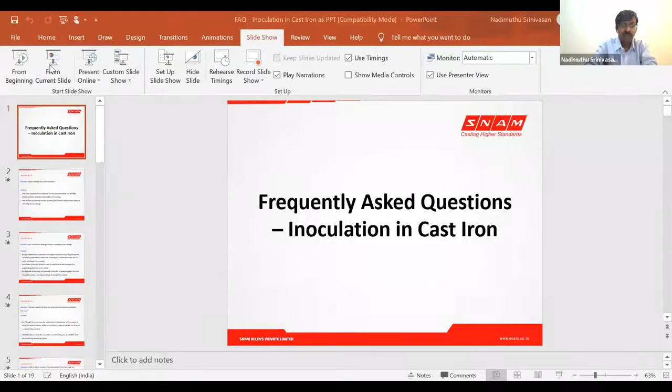So I hope my audio is audible and you're able to see the screen completely. It's perfect. Okay, thank you. So let me proceed then.

So I will go over the questions. I have selected around 12 questions. Of course, not exhaustive, because you, the foundryman, face plenty of issues. Mr. Manish Patrikar has also briefed you that we have to look inward first, look at the process, and the solutions that come from these are like the salt that Mr. Kumar said. It's all the ingredients together that form a good casting. But we have these questions, so they keep popping up.

So what is the purpose of inoculation? The main purpose of inoculation is to reduce undercooling and thereby provide uniform nucleation throughout the casting. The uniform nucleation ensures uniform graphitization. Now, just to explain the terminology, if you go into YouTube and look at undercooling of water, water is supposed to freeze at 0 degrees and form ice. If you keep it at a still temperature, even at minus 4 degrees, it does not form ice. You just tap it and you will see that it suddenly freezes.

So the same thing, undercooling is that it doesn't freeze at the given liquidus point, it goes below that. And then if it suddenly solidifies, you have carbide formation. So you have to reduce that undercooling and see that, at the eutectic temperature, the metal freezes. This is the main purpose of inoculation. By doing that, there is a uniform graphitization, and that helps achieve good casting.

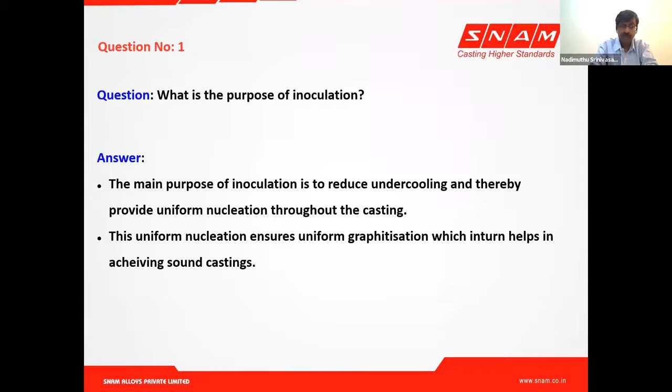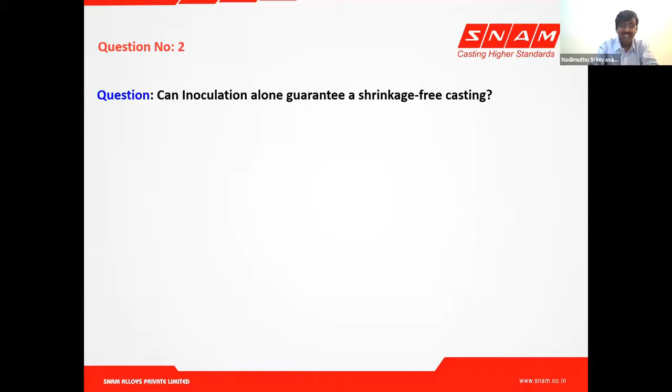Can inoculation alone guarantee a shrinkage-free casting? Something Mr. Manish also addressed. During solidification, volumetric shrinkage is bound to occur because of the austenite contraction. That is why by altering chemistry, the graphitization potential, and changing the solidification rate, we can avoid shrinkage. What does this mean? If you had only carbon, why don't we just melt pig iron and form the casting? When there is austenitic contraction and volumetric shrinkage is happening, you need the right presence of carbon for the free graphite to expand and fill within this volumetric zone and provide you a sound casting.

So how does that happen? By inoculation, which influences the rate of solidification by reducing the undercooling. And how does it increase the graphitization potential? By improving the nucleation sites. By improving the nucleation sites, there are a lot of areas where graphite is going to expand, and the volumetric shrinkage that is distributed throughout is compensated by the graphite expansion and provides a shrinkage-free casting.

So you need the rate of solidification, which can be done by your methoding, your chemistry, which influences the TL and the TE low, the liquidus and the solidus temperature also, and inoculation provides a nucleation site where the graphite sits and expands. So all these three in combination can provide you a shrinkage-free casting. Inoculation alone will not provide you the solution.

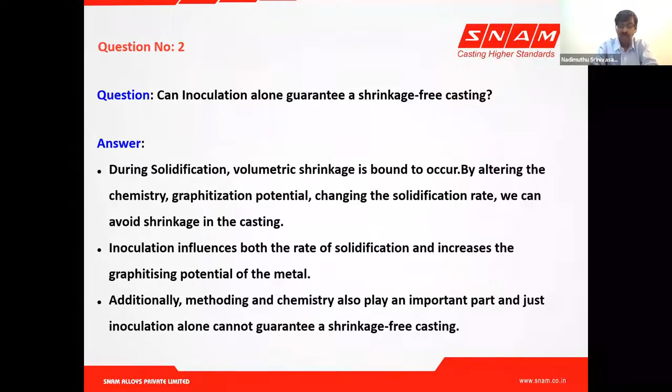There is a myth that gray cast iron does not require inoculation. Is it true? Because some people have been telling this. No, because the manganese and sulfur from your base metal form the substrate for the nuclei. But for this manganese sulfide substrate to sit, it has to sit on a barium oxysulfide or a calcium oxysulfide or aluminum oxide or strontium. Above that MnS, and above the MnS is where your graphite locates and expands. So you cannot just feel that without any inoculation, I can produce gray cast iron. That is not true.

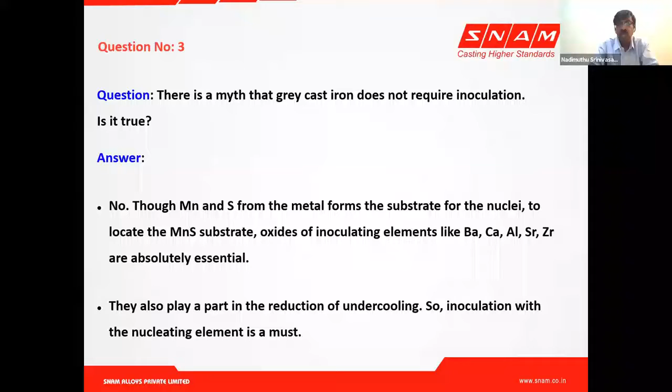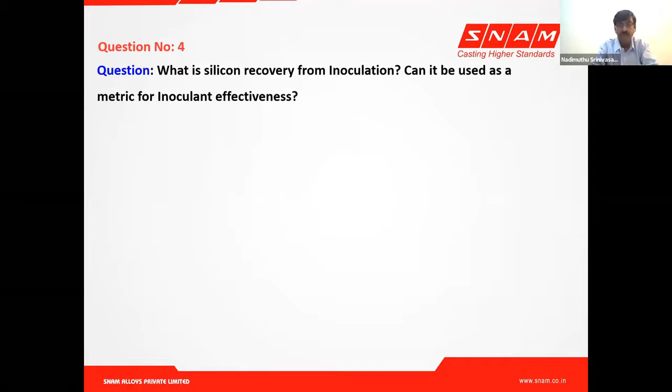What is silicon recovery from inoculation? Can it be used as a metric for inoculant effectiveness? I'm giving you some scenarios where the silicon percentage in your inoculant is 65%, 70%, and 75%, assuming a uniform addition rate of 0.2%, and you get a silicon increase of 0.12, 0.13, and 0.14. So if you were to look at it, in the first case, 0.2 into 65 should be 0.13. You have got 0.12, which means the recovery of silicon from your inoculant is 92%. So each case I have presented.

Now, in alloying, the method to increase silicon is by addition of ferrosilicon. You should not look at increasing your silicon from the inoculant and use that as an effectiveness measure for the inoculant. The purpose of the inoculant is to provide nucleation sites. The purpose of ferrosilicon in the inoculant is to be the carrier for these elements like barium, calcium, strontium, which hardly take up more than 5%. So how would you add that 5%? You need a carrier. The carrier is ferrosilicon.

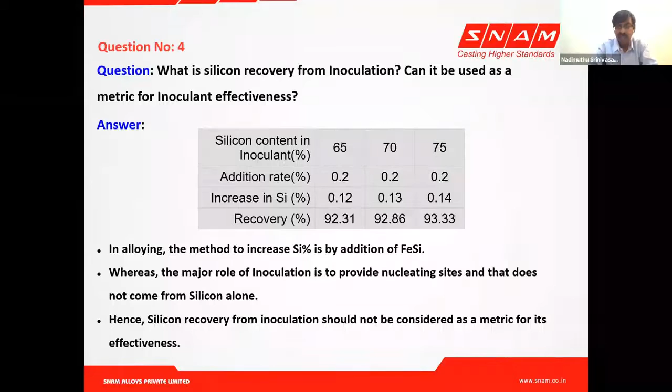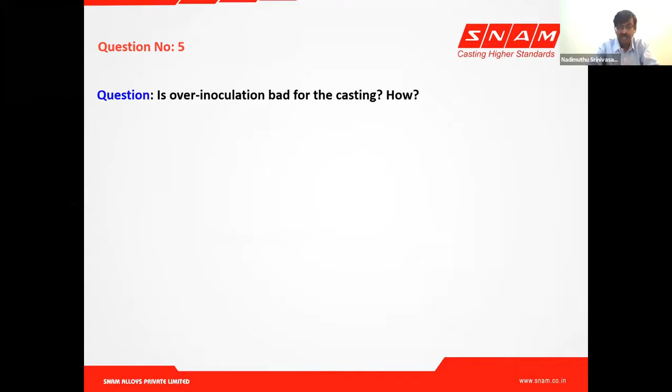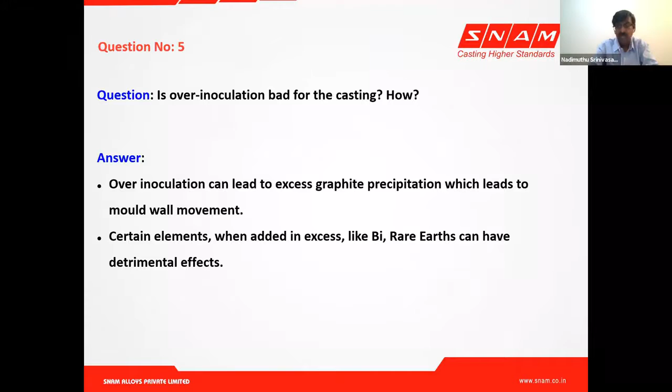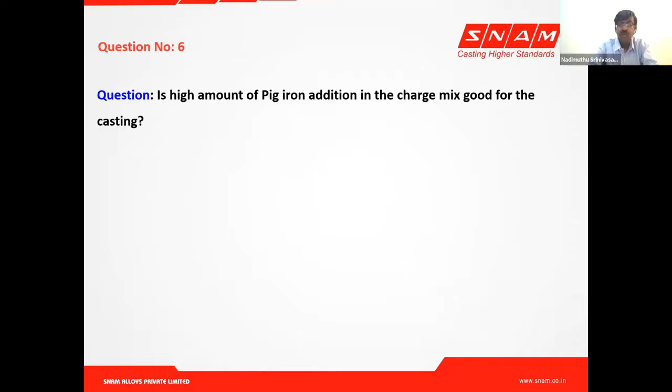Is over inoculation bad for the casting, and how? Over inoculation can lead to excess graphite precipitation, which can lead to mold wall movement. Also, special inoculants like bismuth and rare earth, when used in excess, provide detrimental effects of carbide formation or machinability issues.

Is high amount of pig iron addition in the charge mix good for the casting? We have been doing some experiments on the percentage of pig iron to use. Pig iron, when added in a specified ratio, improves graphitization potential because of the presence of elements like sulfur. But a higher addition of pig iron may pose a problem of higher carbon, and you must have finer control of your carbon equivalent.

Otherwise, this high carbon equivalent can give you lower mechanical properties. Also, other elements like titanium and phosphorus are present in the pig iron, which can affect the graphite shape and also result in carbides.

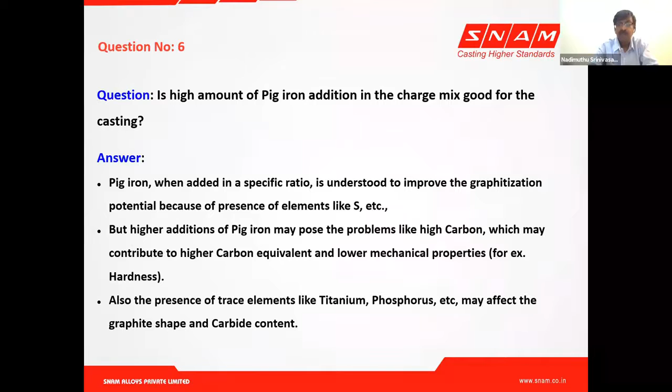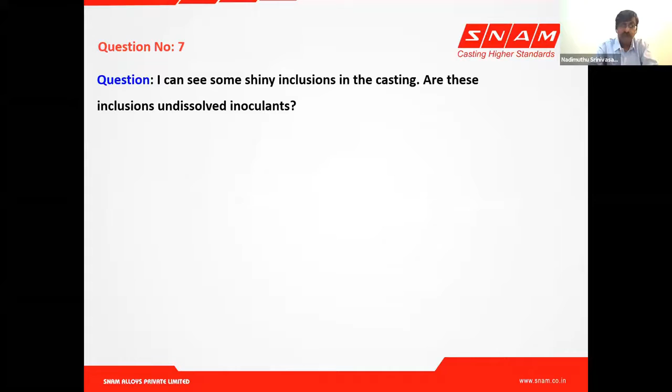Now, I see some shiny inclusions in casting. Are these undissolved inoculants? These are some of the questions that rise up for the foundry man. Inoculants dissolve in the temperature range of 1150 to 1250. In the pouring process, the impact of low temperature and inoculant practice can result in incomplete dissolution, leading to localized concentration of inoculant. If that happens, you may see some shiny inclusion, but they are not necessarily undissolved inoculant.

The way the alloying is done, a ferrosilicon-based inoculant should dissolve below the liquidus temperature of the chemical composition of the metal you are pouring. So there is very small possibility of the inclusion being inoculant unless a non-suitable size is used. You use a very big size in a small treatment ladle, or you add it very late so that the temperature of the molten metal is at TL, and by the time you add the inoculant, it starts solidifying. Only in such a case can it happen.

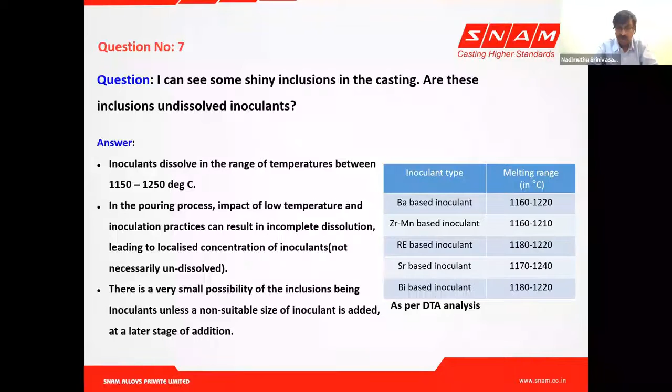The composition of the ferrosilicon based inoculant is designed in such a way that it melts even before your TL, the liquidus. So here are some of the temperatures - I'll go back to this, you would be interested. The barium based inoculant, the zirconium manganese inoculant, rare earth based, strontium based, bismuth based - we have taken these melting ranges based on the DTA analysis.

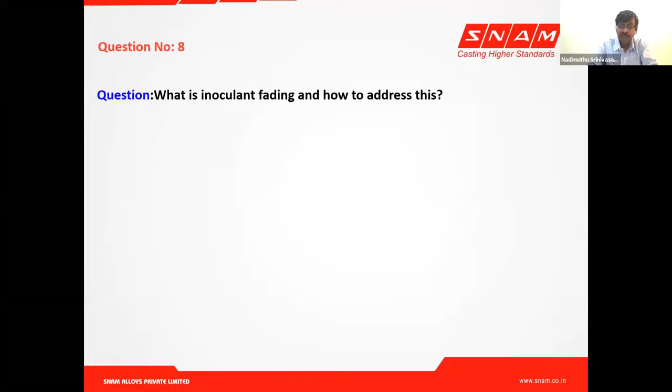Now, what is inoculant fading and how do we address this? I think inoculant fading was also described by the previous panelist, even with a graph. Effect of inoculation is maximum immediately after the addition. Unfortunately, the fading of inoculant is also maximum immediately after addition - 50% of the potency of the inoculation is happening very fast.

So how you add the inoculant, what size of inoculant you add, the temperature at which you add - these are very, very important. All inoculants, all your magnesium alloys and ductile iron, they all fade. It is a characteristic, so it is in the process parameters that you will have to counter the effects of fading. If you look at a barium-based inoculant versus a ferrosilicon with calcium and aluminum - barium acts when the temperature is above 1420, when you have a pouring temperature, barium is effective. Below that, calcium is effective in forming the calcium oxysulfate. So to some extent, the composition of the inoculant helps, but the inoculation fading has to be jointly addressed with the process parameters.

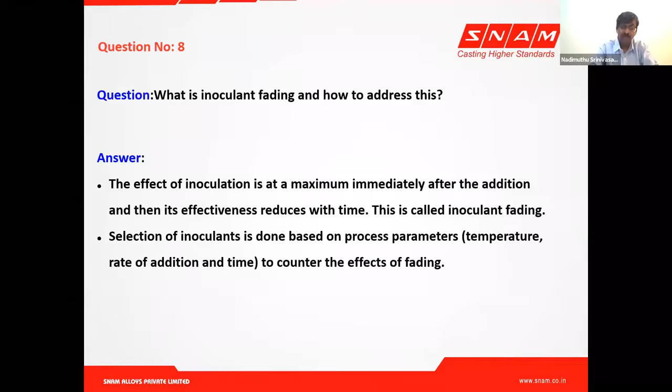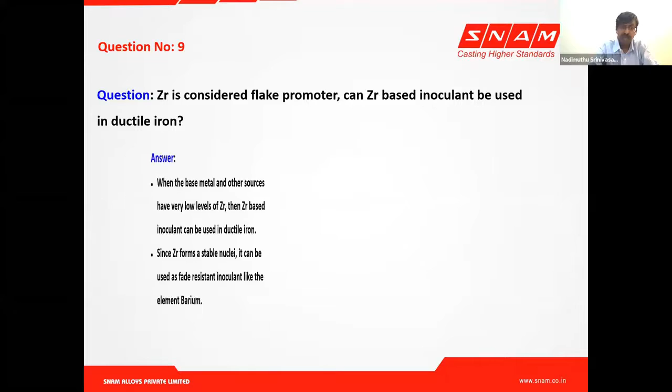Now, can zirconium be used in ductile iron? Because we have seen that being used in gray cast iron - can it be done? When the base metal and other sources have low levels of zirconium, yes, zirconium based inoculant can be used in ductile iron. We have seen ductile iron foundries using zirconium calcium based inoculant in their process. Since zirconium forms a stable nuclei, it can be used as a fade resistant inoculant. Barium, zirconium, strontium - they all form stable nuclei at a higher temperature.

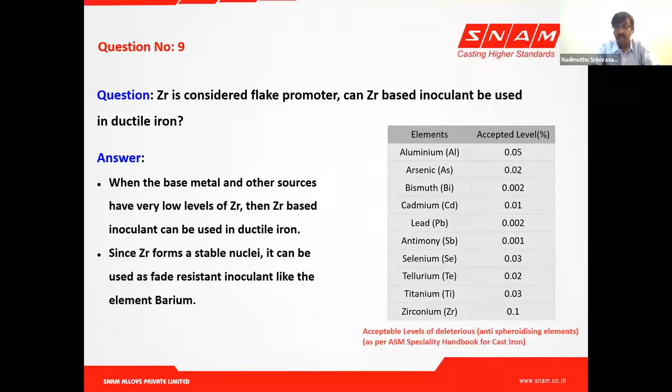So just to clarify, what is the accepted limit, since we mentioned the base metal and other sources should have very low levels of zirconium - what is the accepted level of each of these elements? As per the ASM specialty handbook, you will find that zirconium up to 0.1% can be tolerated. So if you are having lower levels in your base metal and the other sources of your charge mix within that range, then zirconium can be used as an inoculant in ductile iron.

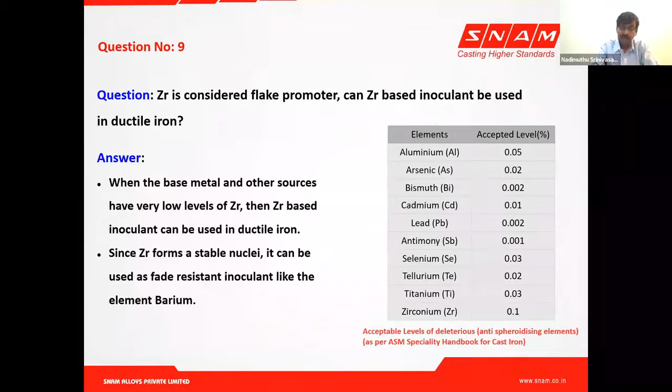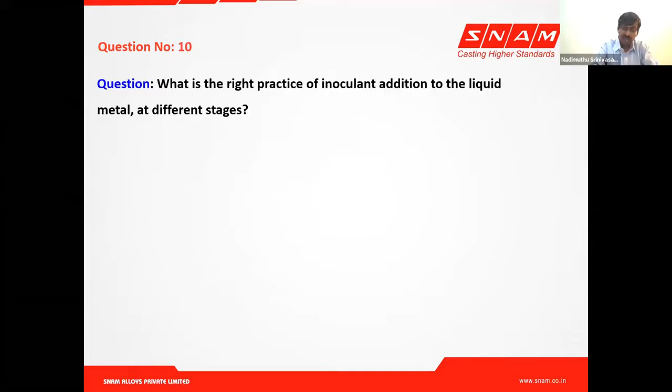The right practice is addition to the liquid metal at different stages. Both previous panelists showed a pictorial diagram of the various methods. Inoculation addition to the stream of metal ensures better dissolution, and since fading occurs immediately after pouring, the best way is either in-mold or stream inoculation.

There are different foundry practices. A foundry using ladle transfer, pouring from the ladle directly into the mold through a monorail, will add the inoculant during the ladle transfer stage. They add it when the ladle is one-third full and complete before it is two-thirds full, leaving the remaining one-third for complete dissolution of the inoculant into the metal.

In stream inoculation, the rate of addition must be maintained because excess inoculation can lead to undissolved inoculant. That is why the size and addition rate never exceeds 0.15%, and very rarely goes to 0.2%. Whereas for ladle addition, it's 0.25 to sometimes 0.3% to compensate for both fading and the higher tapping temperature and pouring time for the last box.

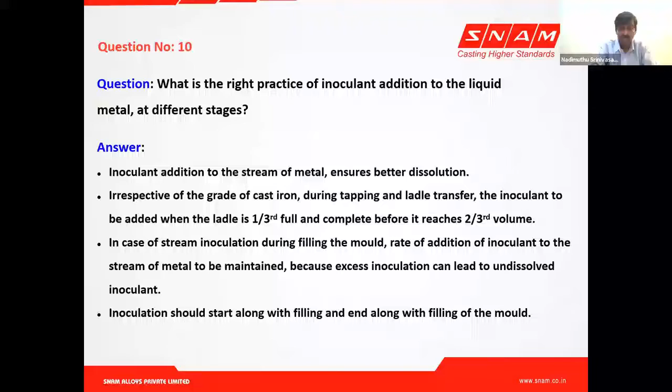Inoculation should start along with filling and end along with filling of the mold. Start and fill - that is how late stream additions work.

Can pure elements like bismuth, silicon, aluminum, zirconium, manganese be added as inoculant? You said like 5% is all this - why can't I add them as a pure metal? Then can I save money?

Any alloy has a lower melting point than a pure metal, which means a pure metal has a higher melting point. When we design ferroalloy-based inoculants, we ensure the melting point and dissolution is lesser than your TL, so we get complete dissolution. Whereas with a pure metal, you have no control - it has its natural melting point, which in some cases may be higher, resulting in undissolved metal. This can cause localized solidification, and around that you can have shrinkage or other casting related defects. So it is always better to add these elements as an alloy.

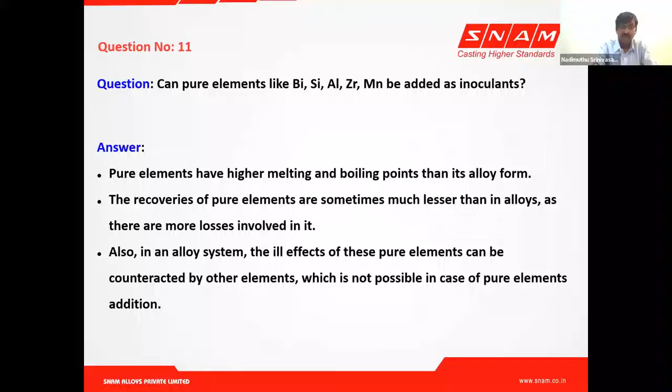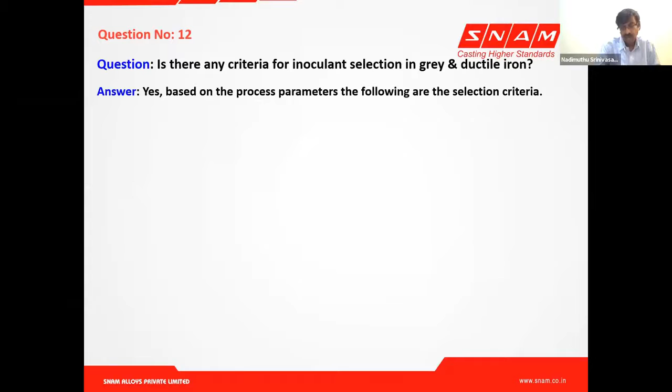Is there any criteria for inoculant selection in gray and ductile iron? This is going to be the last slide. We do have criteria based on process parameters - pouring temperature, casting section thickness, pouring time, and composition of the metal.

So section thickness, inoculation addition stage, pouring time, and tapping temperature - based on this, what types of inoculant can you add? Can you add calcium based, barium calcium based, zirconium calcium, zirconium manganese, strontium based, strontium zirconium, lanthanum based, or aluminum based? This chart gives you the selection guide.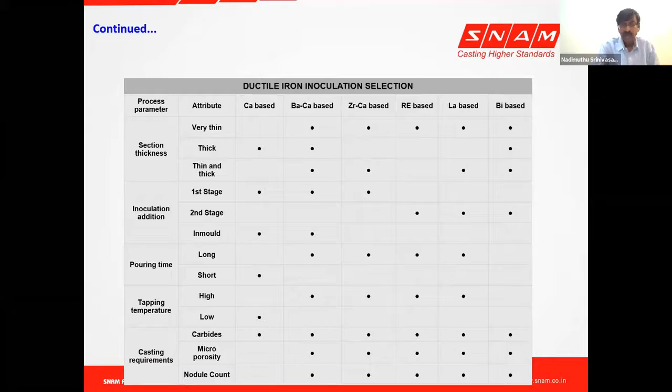I have taken just these 12 questions that could pop up in a foundryman's mind as frequently asked questions and tried to address them. That brings me to the end of the PowerPoint presentation. Thank you all for your participation and listening, and I once again thank the organizers, the Dynamic Foundry Group, and the co-panelists for this webinar. Thank you once again, thank you.